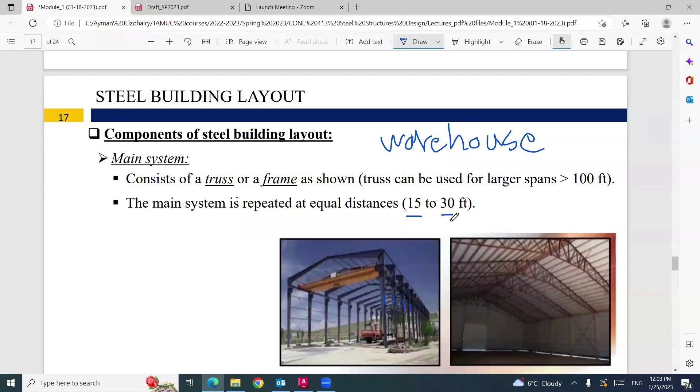Then we have something called the purlin. These purlins are connecting the main system at the top roof, and you have the full freedom to choose the location of these purlins if you are using frames. But we highly recommend the spacing between these purlins in the range of 5 to 10 feet.

But if you are using trusses, you don't have this freedom, because your purlins must be located at each joint of your truss. Not accepted. It's wrong if you put purlins resting on the member of a truss directly. It's not correct.

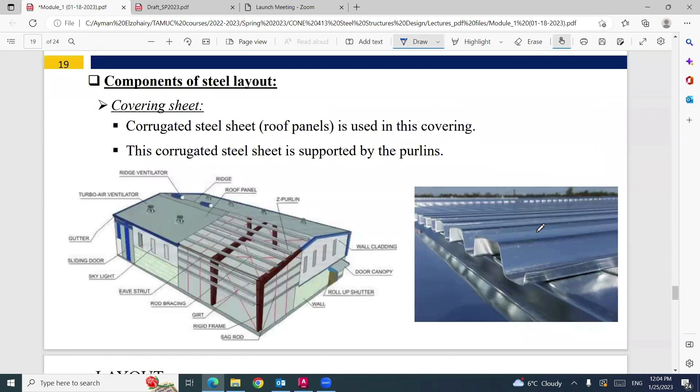After you put your purlins, we can put the corrugated steel sheets as the roof panels to make your covering sheet. We have also, from this side of the building and the other side, and this side also, something called side girts. Something looks like purlins, but extended on the side of the structure. We have end gables from only two sides, this one and the other one.

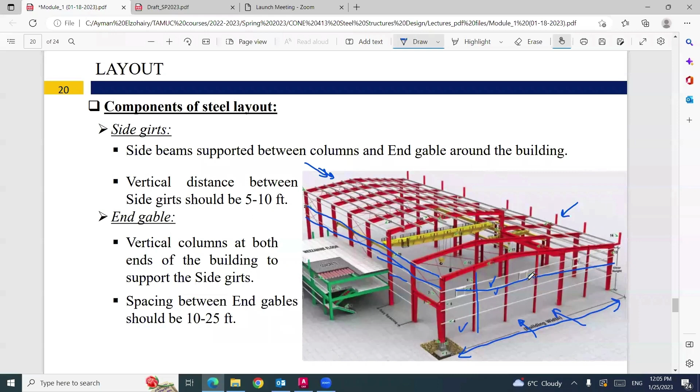We cannot leave this span, this width of the building, without any intermediate columns. So we will provide columns here. These columns are called end gables, just to support your side girts and also to support walls or doors or windows or whatever you have from this side and the other side.

And the last component was the wind bracing. I told you the wind bracing is used for the first and the last panel. If the length of the building is too much, more than 50 or 75, we can provide one in an intermediate panel. But if your length is smaller than this, that's fine, the first one and the last one only.

Horizontal bracing at the top, we are doing this diagonal. And if you have horizontal wind bracing, that means you must have vertical wind bracing, just a diagonal between the two columns of the main system. So these are the different components of your warehouse.

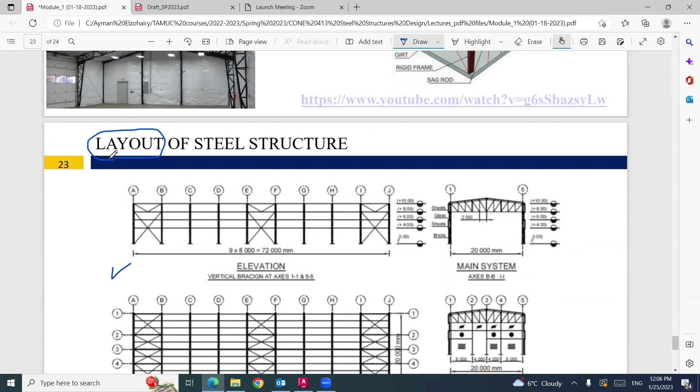Today, we will learn how to draw your views, which is called layout. This layout is very important because you will determine some information. Keep in your mind, the plan means you are looking from the top. This is called plan view.

And I would like to highlight a point. The language between engineers, each other, and between engineers and workers is drawing. I will not write a statement explaining the warehouse components. No, I will provide this drawing for the workers or the general contractor. That makes sense? So what I covered verbally last meeting is already explained in this drawing.

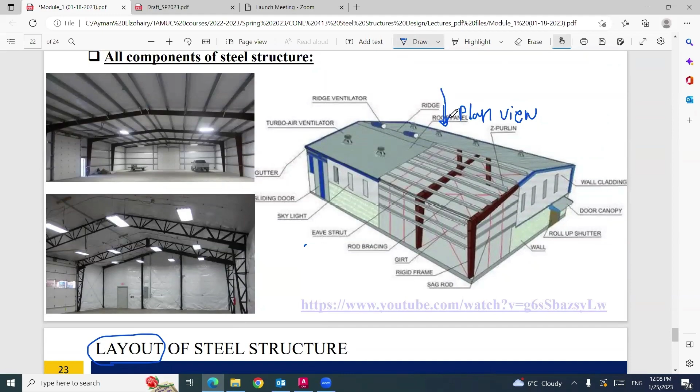Let's see. I will explain first how to draw your plan, and what all of these lines mean, one by one. Plan, as I told you, you are watching from the top. So I have a question. If you look at this main system from the top, which is repeated uniformly, anybody can tell me what you are going to see?

Line, thank you, Mitchell. Yes, only one single line. This line is representing the top part of the main system. What about this column? You cannot see it because you are watching from the top. However, I will represent these two columns by this I section and this I section.

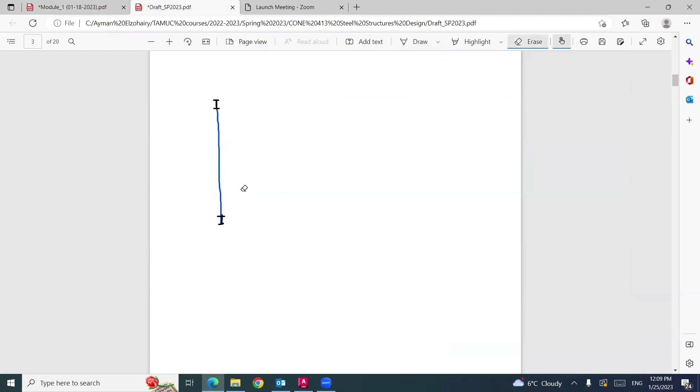So what does it mean? It means we have two columns and this line in between represents the beam of the top part of the main system. Keep in your mind that this main system, frame or truss, I don't care. If you are watching from the top, I will see only the top part of this main system. Just a line, and then a column, and another column.

Keep in your mind, this main system is repeated with uniform distance. So I will repeat these lines here. One more.

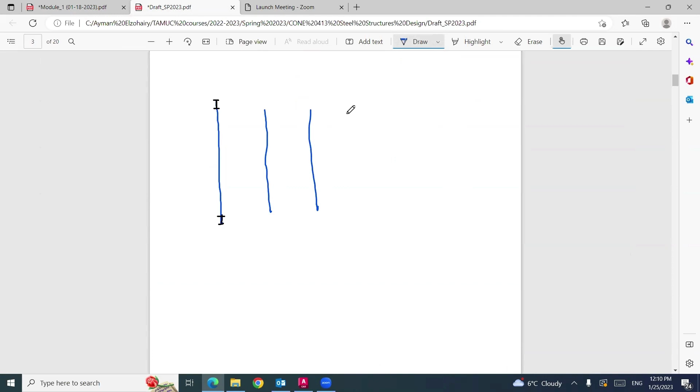I'm repeating the main system, however many you have, but all of them at equal spacing. Keep in mind, it looks like we have 1, 2, 3, 4, 5, 6, 7 spacings. Assume your spacing is, for example, 15, 20, 25 or 30 feet, because we have a range for spacing between main systems. So

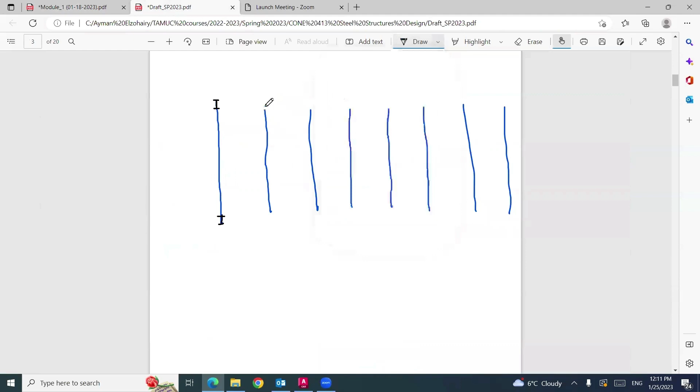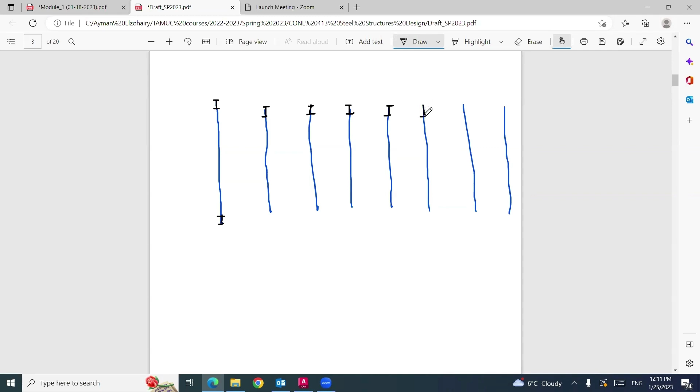I draw this main system as a line, and this column looks like this, and this column looks like this from the top. So I will complete my columns. If you are using AutoCAD, it will be very easy. Just draw one and make copies. I will show you this on AutoCAD very soon. And also from the other side.

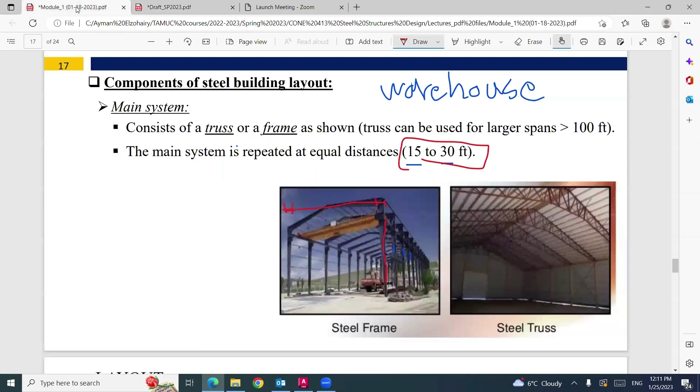What I'm drawing right now is a plan. I'm drawing the main system, how it will look in plan. These are the main systems of your structure. This line is your main system, this line is your main system, and so on.

Does that make sense? So these lines, which are solid and thicker, represent the main system. Keep in mind, I put an indication for the columns, just something very small like this, an I at each main system. That makes sense? This is the first one. Keep in mind,

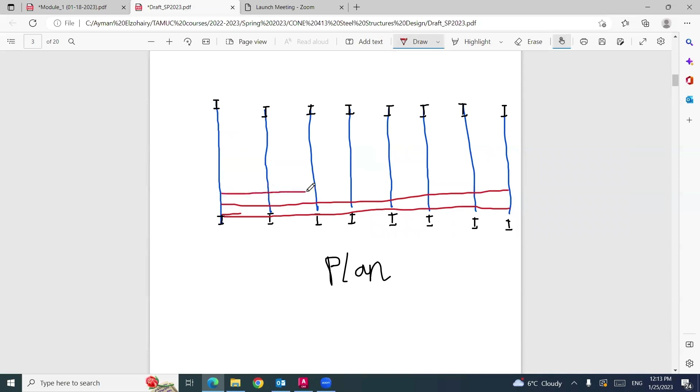we have purlins. I will change the color. These purlins are perpendicular to the direction of your main system, in the second direction. So if you represent your main system as a line like this, the purlin will be in the other direction. Do you remember the spacing between your purlins? You determined this, for example 5 feet, 6 feet, whatever. So I will draw lines this way. We have a purlin. After 5 feet, I have another purlin. After 5 feet, another purlin. I'm not 100% exact, but these are lines.

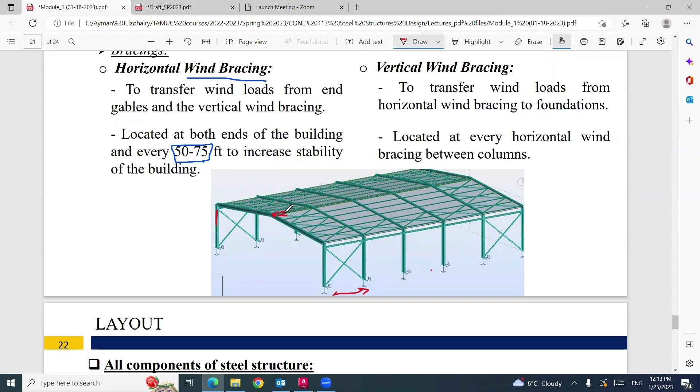Assume they are lines. One more important thing: if you look here at this top point, we should have two adjacent purlins. Here you go. This is the top point of your main system. Because at this point we have different slopes, the slope of this part like this and the slope of this part like this. So this is a turning point. At this turning point, we provide two parallel purlins, one at the end of each part of the main system. That makes sense?

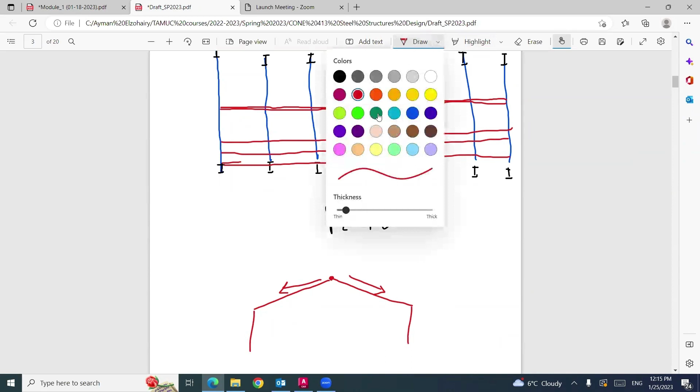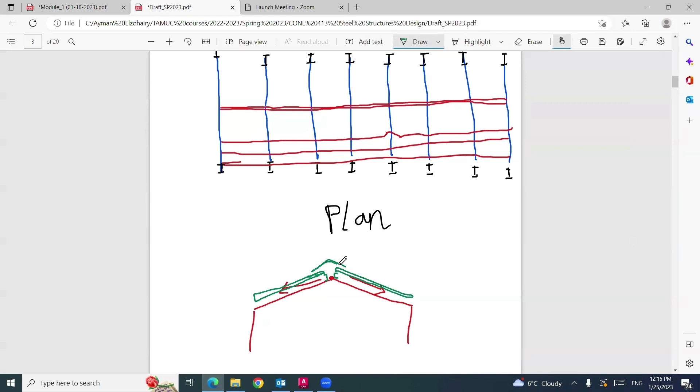So at the intermediate point, we should have two adjacent parallel lines. These two adjacent parallel lines represent the point of change between this slope and this slope of your main system. We provide two purlins, one at this end and one at this end. This purlin will support the corrugated sheet covering this part, and this purlin will support the corrugated sheet covering this part, and here we will provide something like this. That makes sense?

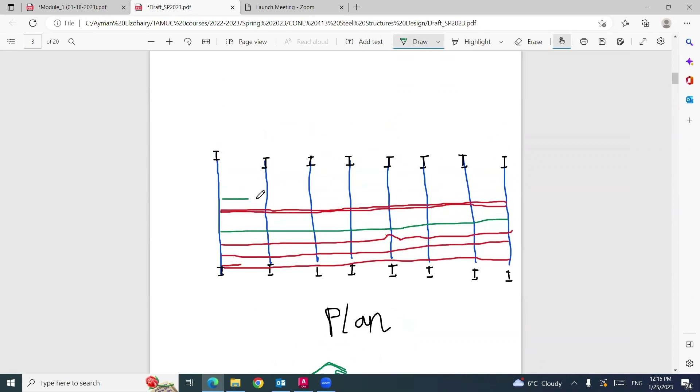So at this turning point, we will have two purlins. Keep in mind, your purlins extend here, every 5 feet or whatever you select. Here you go. That makes sense? So in your plan, at the midpoint of your main system, we have two adjacent parallel lines. This is a purlin, another purlin, another purlin, and here two, with just 1 or 2 millimeter spacing between the parallel lines. And we have purlins here. That makes sense?

In the first panel and the last panel, I will draw diagonals representing the horizontal wind bracing. Probably we can use this color. For each two purlin spacings, I will draw a diagonal. We are missing one here; we should have one more, because your plan must be symmetric. This side exactly like this side. So we should have a diagonal. I will provide these diagonals at the first panel and the last panel.

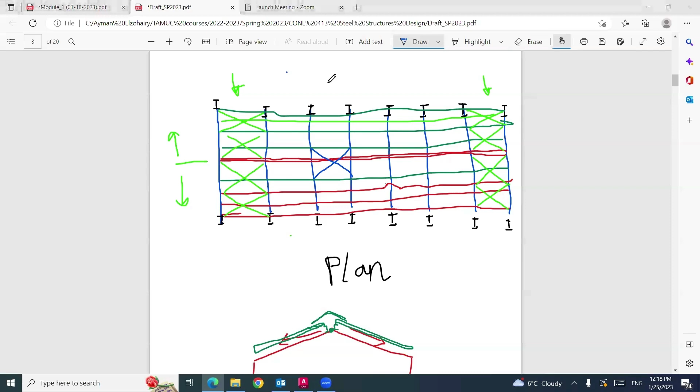The fatal mistake here is if you draw a diagonal like this, and I would like one of you to say what the mistake is if you draw a diagonal like this. Can I do this? Can I do this diagonal at this location? If not, why? Thank you. Yes.

Let's go back here for this one. Everybody, can you watch the top? This is the turning point between this slope and this slope. I need one of you to imagine, how can I draw a diagonal between this side and this side? Doesn't make sense, because you are connecting two different slopes, two different surfaces.

Yes, I understand that you can provide a diagonal between this point and this point. We can understand that we can provide diagonals between these points and these points. Doesn't make sense to provide diagonals between this side and this side, because you are talking about two different slopes. That makes sense? So don't do this.

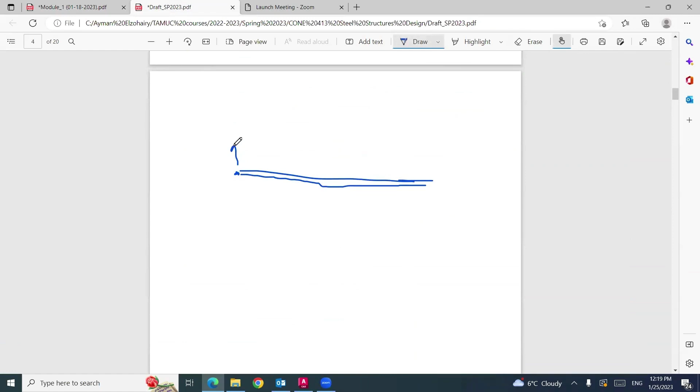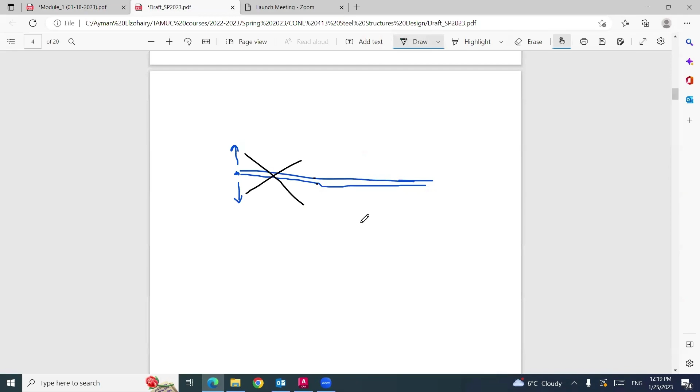If you have the two adjacent parallel purlins, which represent the turning point between this slope and this slope, don't do this. Don't put diagonals crossing these two adjacent lines. Doesn't make sense. You are doing a mistake. So these diagonals will end at these two parallel purlins.

That makes sense? Because we have horizontal wind bracing, we must have here vertical wind bracing, which represents this diagonal or these diagonals. So I will represent them by a dashed line here and a dashed line here. That means I connected diagonals between this column and this column, and another diagonal between this column and this column. Why? Because I have horizontal wind bracing.

We must provide the wind bracing at the first panel of your plan and the last panel of your plan. So we must have horizontal wind bracing and vertical wind bracing. If this length is too long, more than 100 feet, I recommend to provide an intermediate horizontal wind bracing. Just a second, like this. I'm sorry, guys, I messed up.

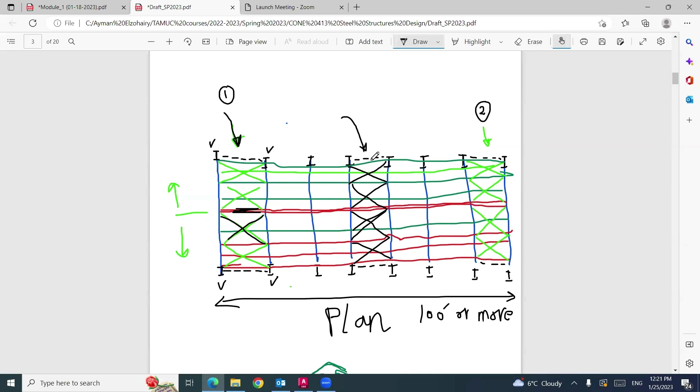And vertical wind bracing. If you have a very long building, if this one is 100 feet or more, I highly recommend to add an intermediate panel with horizontal and vertical wind bracing. If you look at this plan, it's exactly what you are seeing. So right now you can understand what's going on.

Hey, I'm seeing something else. Yeah, you are seeing circles and the name of each axis. It's just for fun, but we draw the main component we are looking for. If you open your AutoCAD, draw a line, for example, it's 30. This is the main system.

I can make this line thicker. Do you know how to make this line look thicker? I can select here the thickness I'm looking for, for example, 0.4. The thickness of this line is 0.4, but it looks normal, because you have to select this icon. If you select it, the line looks thicker. You know what I mean?

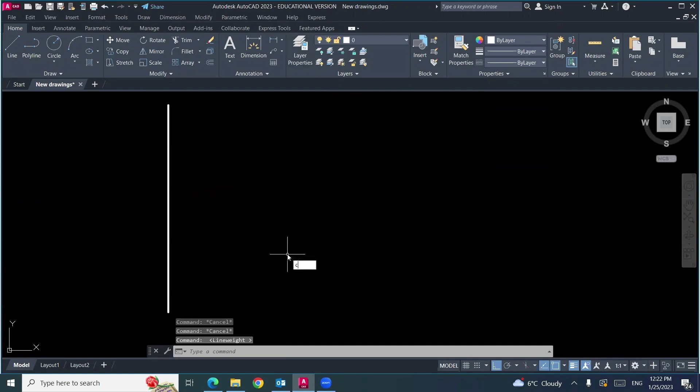And you can make a copy of this line. For example, the spacing is 20 feet. Then I can make more copies from this one to this one to this one. So if you are using AutoCAD to draw your plan, it will be very easy.

At this location, if you would like to represent your column as rectangles, that's fine, no problem. I will accept it. And you can hatch this rectangle as solid and move it to this end. So we have a column here and another column on the other side. These columns are repeated because we have the main system.

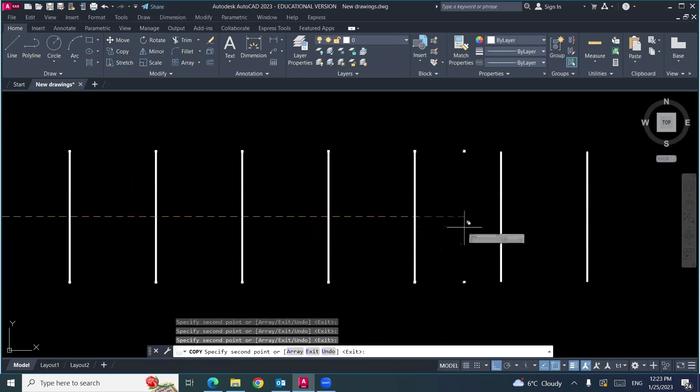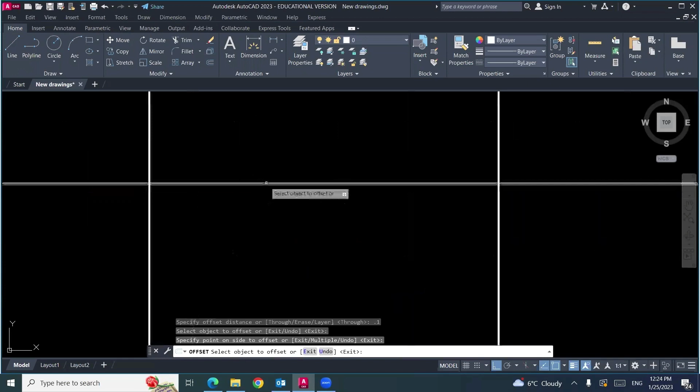So in a second, you can finish your drawing. These are the main system. Keep in mind, from the midpoint at this location, we must have an offset of 0.1, for example, 0.1 this way and 0.1 this way. So we have two parallel purlins at this location.

So I drew the length as 30. We have a purlin here also. So the spacing between this one and this one is 15. I will divide it into 5 spacings or 3 spacings, whatever, it's up to you. I will make an offset of 3 meters.

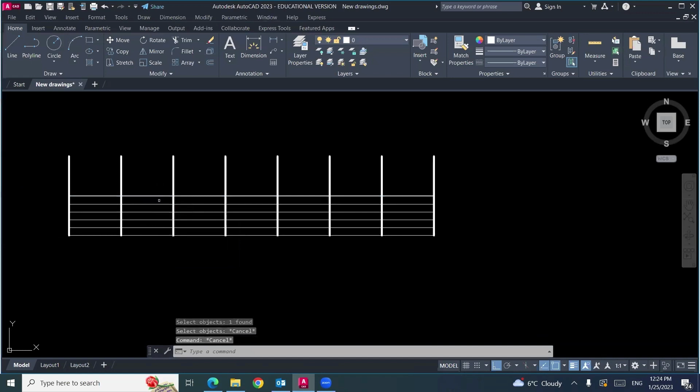There you go. If you would like to make a mirror, I can select all of these. Mirror, MI. I can select all of them and make a mirror like this.

There you go. So I draw this plan. I draw the main system, looks like lines. I gave indication that I have a column here.

It can be accepted like rectangles, that's fine. But the best way to draw your column looks like this. This is the best way.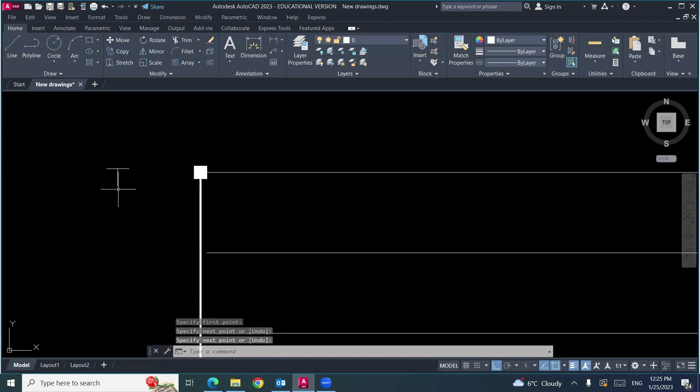Looks like this. And if you would like to make this thicker, you can select the thickness and then move them at this end. This is the best way.

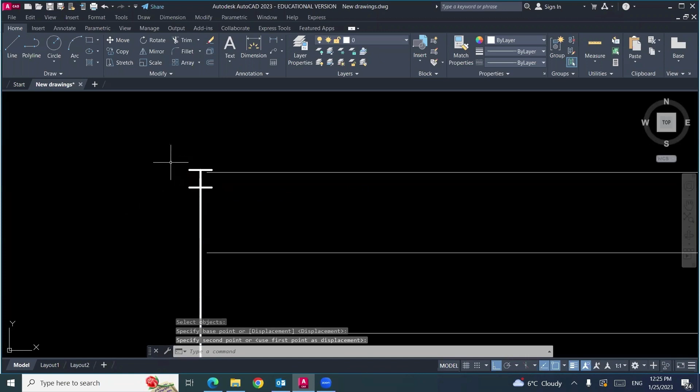I'll remove this one. There you go. This is the best way to represent your column. But if you would like to make it like rectangles, that's fine. I will accept it, but this is the best way.

Okay, let's remove these. In AutoCAD, everything can be done very quickly. Just to remove.

Then I will take copy for this column and make many copies.

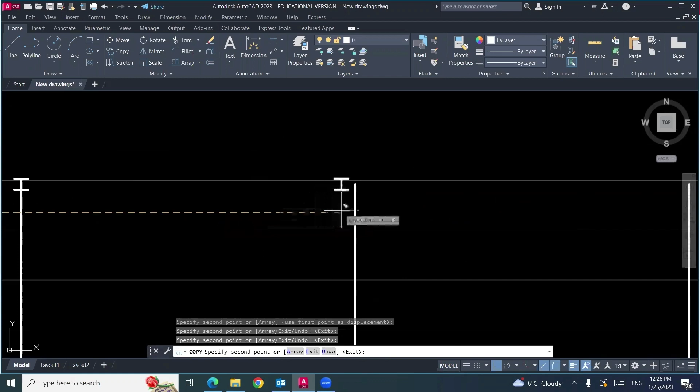It's very important to remember how to use AutoCAD in your drawing, not just for this course, but for your life. AutoCAD is important. Once you did one side, you can make mirror for this and make mirror about the midpoint.

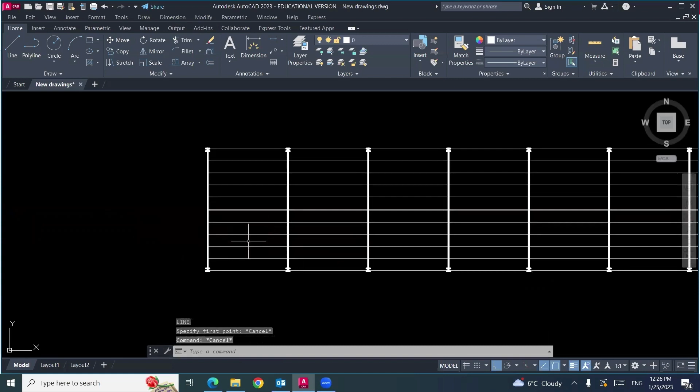Here you go. Yeah, that makes sense? For diagonals, I will do diagonal, but keep in mind 1, 2, 3, 4, 5. We have 5 spacing, so you can adjust them, making diagonal.

Like this for the first 2. And then you can make diagonal with the next 3.

That makes sense? You cannot leave one rectangle without diagonal. If you decided to put wind bracing at the first panel, you have to provide diagonals for all of them. If you put your diagonal for each 2, that means the remaining one will be without diagonals.

It's okay to provide this diagonal, but we don't recommend using one diagonal for one rectangle. I can accept this, I will not say it's wrong. Okay.

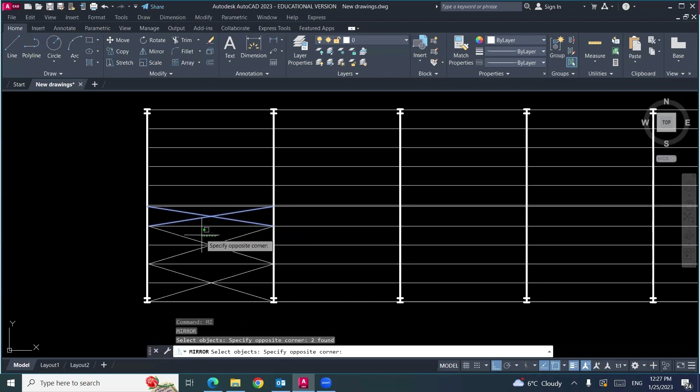Once you did this for the first side, I can make a mirror. Here you go. So you did this for the first panel, I can make copy for these diagonals.

I can make copy. How can I make a copy right now? Okay, I can make a copy from this column.

I did a copy to this one. No, I did not do a copy, I did mirror. Anyway, CO, enter, copy for these members.

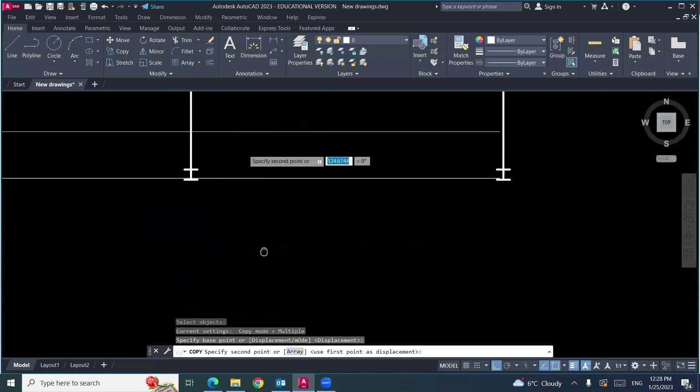And I will catch it from this column and put it here at the same point on this column. There you go. That makes sense?

I highly recommend you do this. If you would like to make these lines dashed, you can do it. But if the dash line scale is too much, you can select it from modify, properties, and make the scale smaller, 0.2 for example.

There you go. If you would like to make this one look like this one, okay, go ahead and select the line you adjusted and choose match properties, this one, and then select.

Oh, I'm sorry, no wait, not this one. Which one? Me, I cannot remember the shape of the icon, but yes, match properties. This one, match properties. What do you mean?

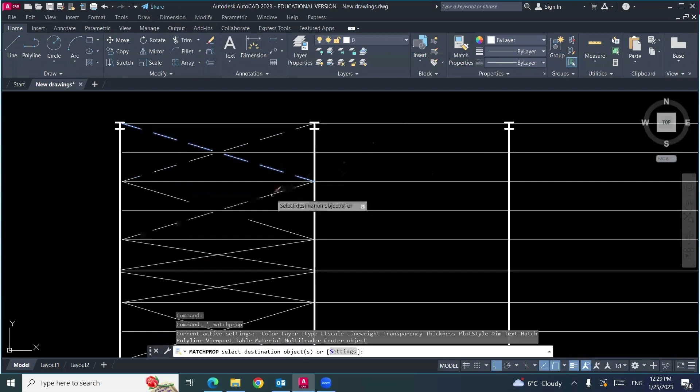I mean, I would like to make this line look like this line. So select what you would like to make like this one, and then get the command, then select the other line, so the other line will be the same.

I highly recommend drawing your diagonal like a dashed line. This is very important. You should do this before doing copy.

These are the horizontal wind bracing.

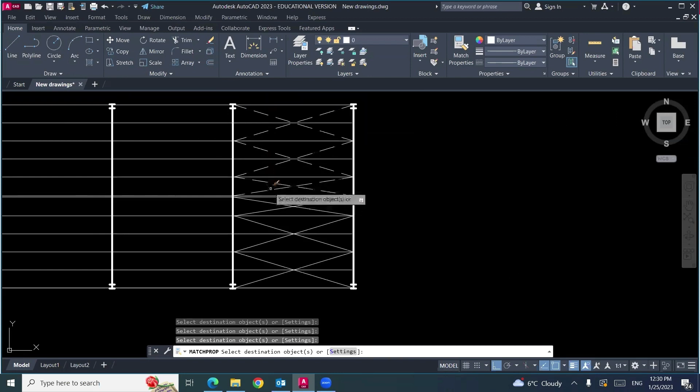There you go. Don't forget, if you have horizontal wind bracing, which are these diagonals, we must have these vertical wind bracing, looks like dashed line.

So how can I do this? Just draw a dashed line here, in this column and this column.

How can I make it dash? You have many options. You can select this one and make match properties, or select your line from this one, select the dashed line. If you feel the scale is too much, just select the line one more time, modify properties, and adjust this scale to be 0.2.

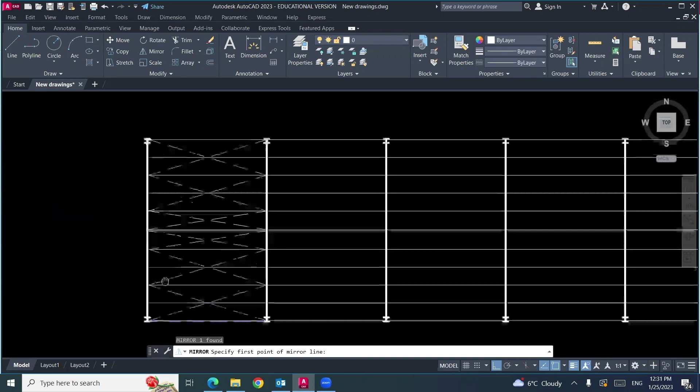Does that make sense? There you go. So I put here the vertical wind bracing. If you would like, make mirror to this line at the midpoint to be on the other side.

If you would like, you can make copy for these two vertical bracing, copy. I can catch it from this column and put it here.

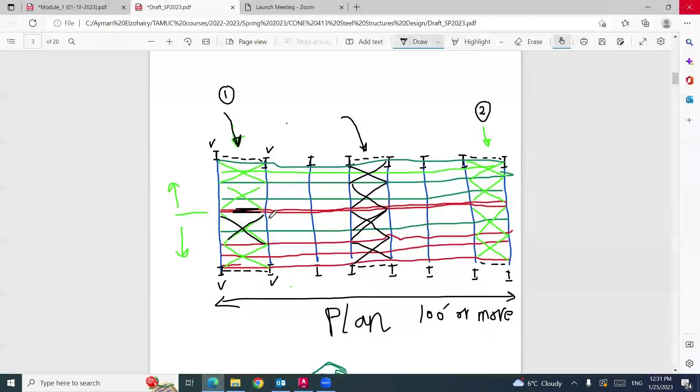This is your plan, this is exactly what it's drawn here. If you would like to make these circles, it's very easy.

Very easy. We can draw a line with a length, for example 3. Line with 3 lengths. I can select this line and it changes the color to be red.

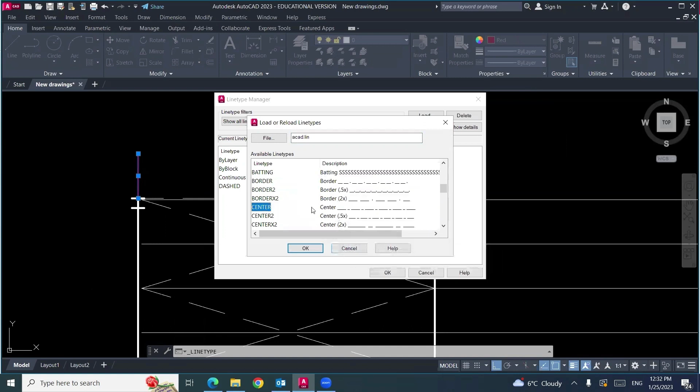And I can select this line and make the shape look like center line. We can select here, center. There you go, center line, center, the first one. Select the line one more time and choose center. So it's a center line.

And draw a circle. Move this circle to be here. Then you can make copy for this center line and the circle and put it here at each column. That makes sense?

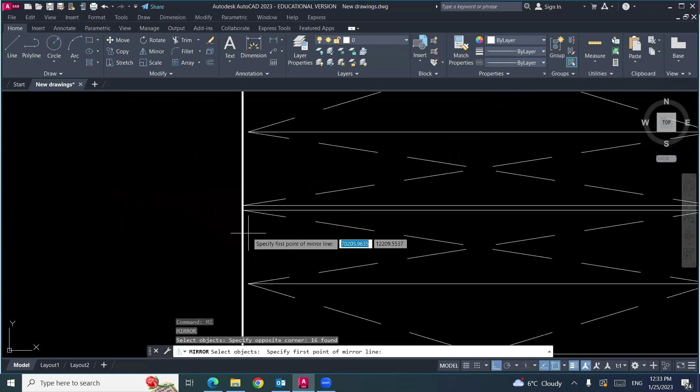If you would like to make mirror for these lines and the circles about the center point, there you go. If you would like to draw circles at each position of your purlins, that's fine, it's up to you, you can do it.

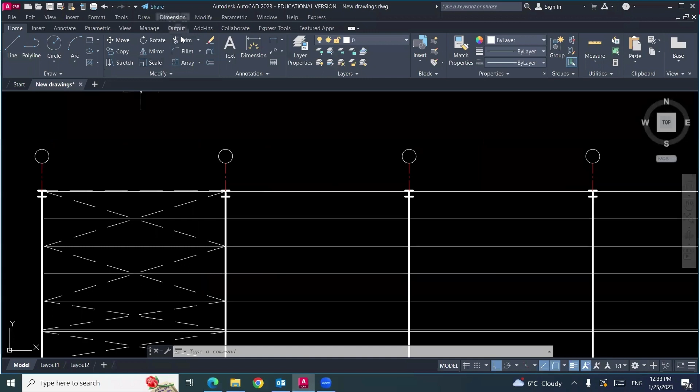And also after you are done, you can put your dimensions. Dimension linear between this line and this line. So the dimension between the main system - if you read your drawing, I can say the spacing between this main system and this main system looks like 20.

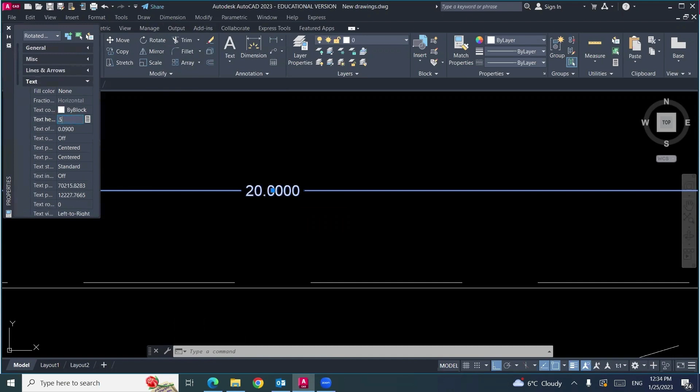If you are not feeling good about this format, you can change it from select it and then modify properties. You can go to text. Your text height can be bigger, 0.5. How many number of decimal? It should be down here. Here you go, the dimension.

No, not this one, just a second. Yes, precision - how many number of decimal? You can select 1 decimal or 2 decimal. I will select 1 decimal. 1 decimal is good, there you go.

Here is the dimension, you can repeat it one more time. Dimension linear from this point to this point. If you would like to make this one like this one, select this one, match properties. Where is that? Here you go, and like this, so this one would be like this one.

Or you can make copy. I will select this one and make copy between this point and this point, and this point and this point, and this point and this point. I put the dimension - I forgot one.

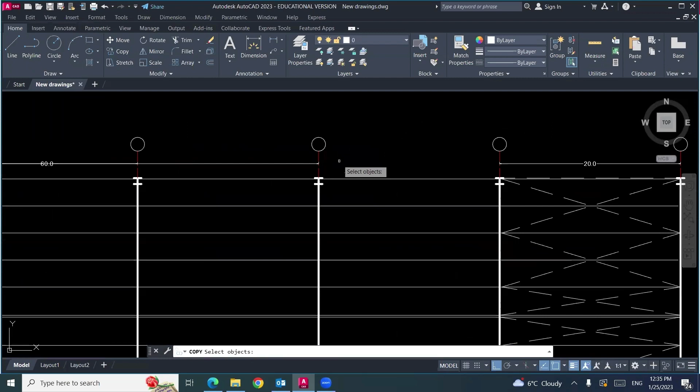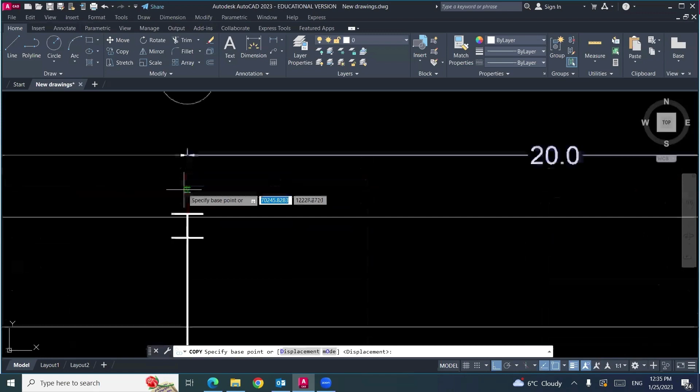Anyway, I recommend to do it one by one. So copy, CO, enter. Between this line and this line, here you go. And this line, here you go. And this line - I messed up.

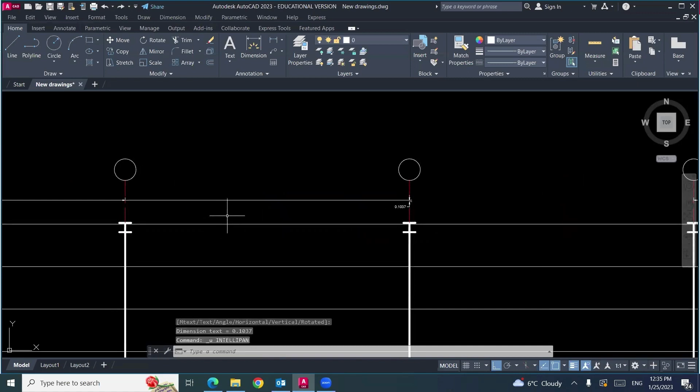Anyway, you can do it one by one. Don't make copy for dimensions, okay? So I will dimension linear between this point and this point. Oh goodness, wait. Dimension linear between this point and this point. One more between this point and this point.

If you would like to make match properties for this line and this dimension line, that's all. If you would like - and I highly recommend it - to put a dimension line for the whole length of your building, so as engineer I can understand that the total length of your building is 140.

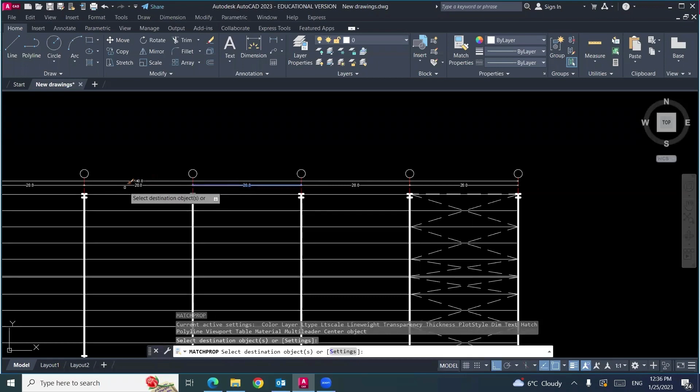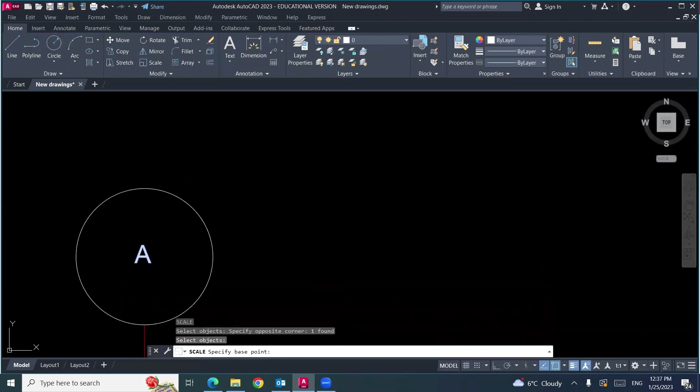Also, if you would like, I can write something here. I can move this A to be inside this circle. I can make it bigger by scale, more bigger, like this. Then I can copy this A to all of them.

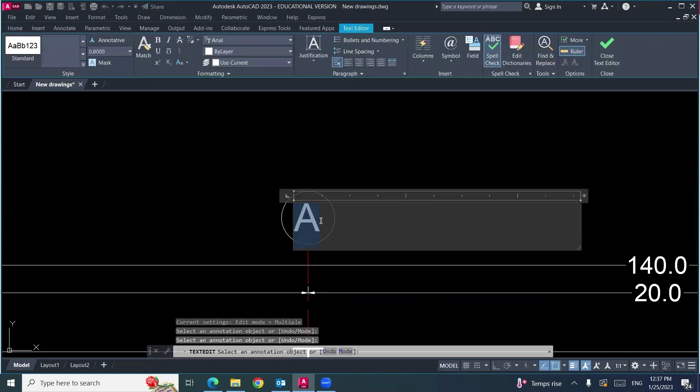You will ask me, hey, all of them are A? No. Once you put copy, you can double click here, or ED enter, and you can change this A to B. Just click, then you can change it to C. Then just click, you can change it to D.

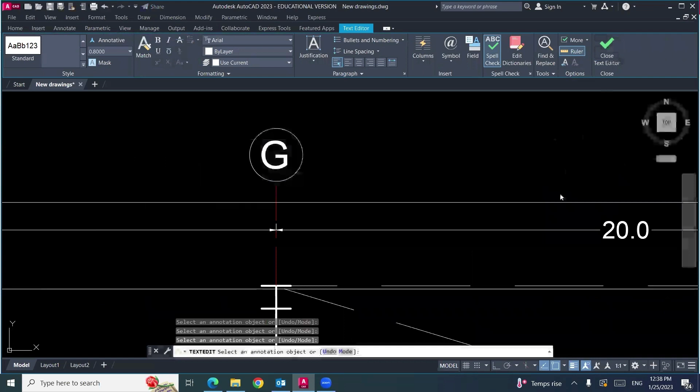Then just click - after D we have E, and click, what after D, E, F I think, F, G, and then H. Which H is important for me - my daughter, her name is Hannah.

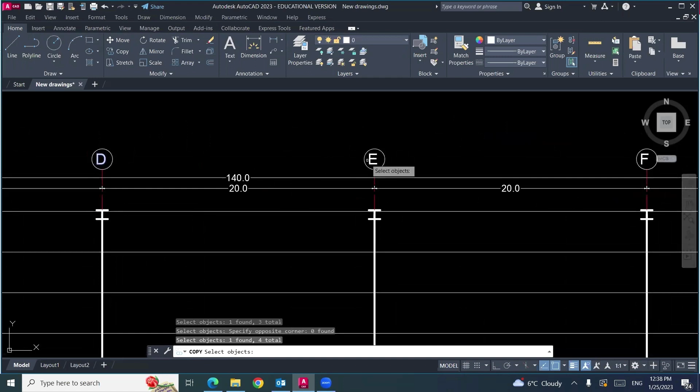So anyway, after you are done with these you can make copy for this text, all of them, and make copy to be on. That makes sense? This is called plan. I finished my plan in just a few minutes, just 15 minutes. This is the plan. I highly recommend it to use AutoCAD.

For elevation, elevation is very easy. You are watching from this side - this is called elevation. What you will see right now, if you are watching from this side, what you are going to watch...

I will watch only this rectangle, nothing else behind this rectangle. I will not look for anything on the roof, this side, or the back. I don't care, I will look only for this rectangle.

So what do you think? I will watch this column, and then the next column, and the next column, and the last column, and I will watch the side girts - side girt, side girt, side girt. And if you have vertical wind bracing, I will see this diagonal. That's all.

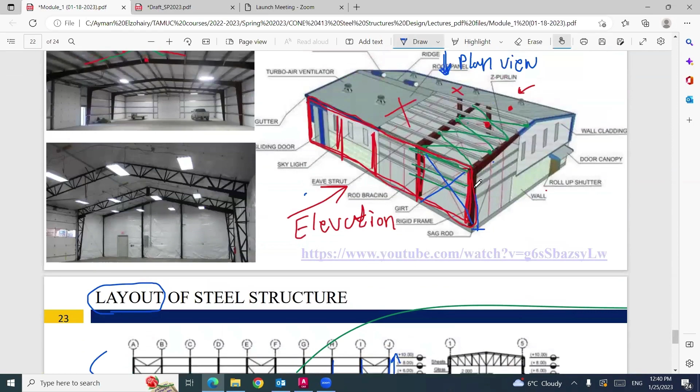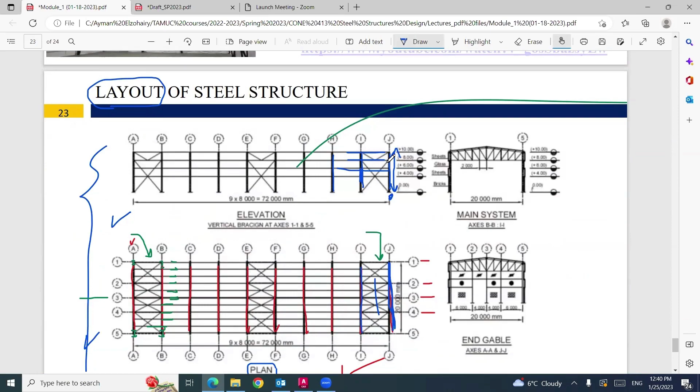And we have side girts, side girts, side girts. Because we have horizontal wind bracing here, we will have vertical wind bracing. The vertical wind bracing will be shown when you are watching the elevation. So let's open AutoCAD and I will draw my elevation.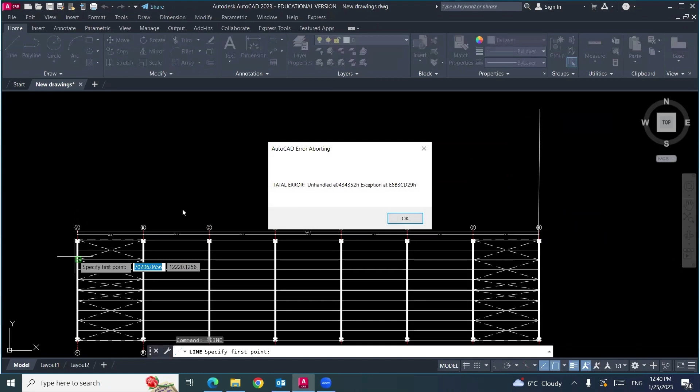Oh, I have an error. AutoCAD will close. I'm so sorry.

Probably I will try to open it one more time. Hopefully it's saved, hopefully. Open. Yes, recover, recover... no? Yes! We did it, we did it. So nothing was lost.

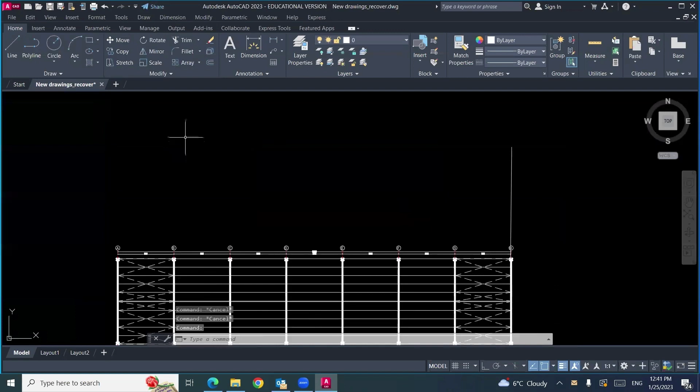Okay, so this is the most important step in your AutoCAD work: all the time keep saving, saving, saving, saving, so you don't lose anything. Sometimes an error can just happen.

So anyway, I will draw a vertical line, and I will have this top. After this, I have purlins, and I have side girts, for example every 3 feet. Then your column will be after 3 feet also, so I will trim.

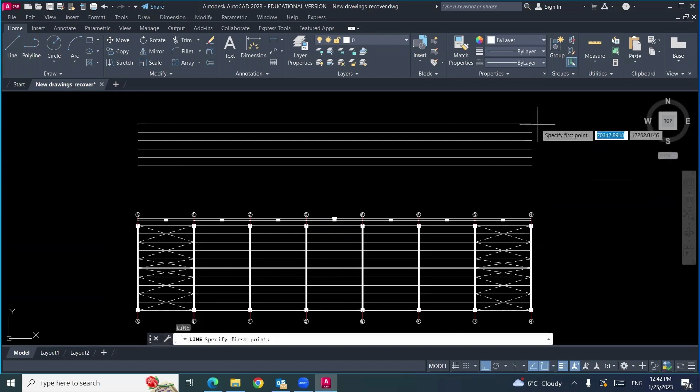Probably I can delete this one, right? There you go. So I have a line, and the line, and this one does not exist. There you go. Keep in mind this line is thick, so I will make it match - this line will be thick, because each main system will have a column in the elevation.

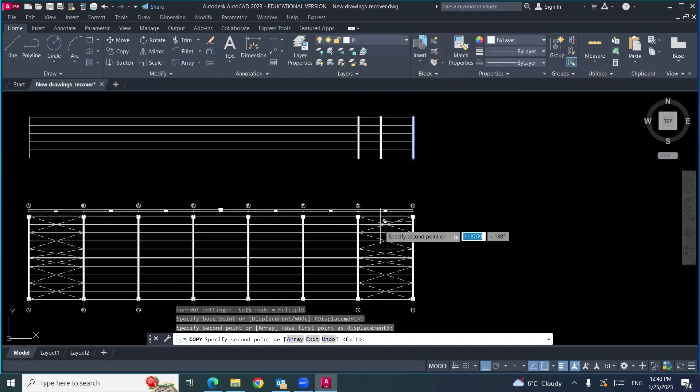So I will make a copy of this column at this location, this location, this location, this location, this location, this location, this one, and the last one. Here you go. Because I have horizontal wind bracing in this panel, I should have vertical wind bracing.

Probably I can do something like this - this diagonal and this, for the whole part. If you make it one diagonal, that's fine, I cannot say anything against it. Also, I will make a copy of this diagonal.

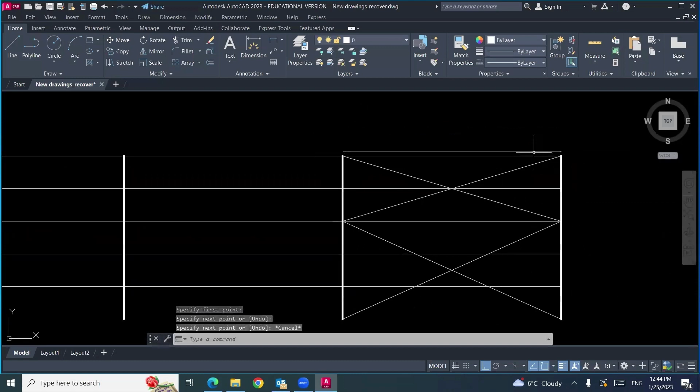Because we have vertical wind bracing here, we should have a line here with a dashed line. I can make it like this, to represent that we have horizontal wind bracing.

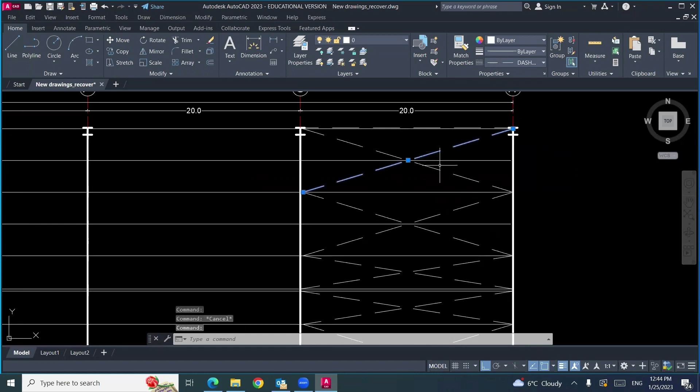So from your elevation, this line represents the horizontal wind bracing as a dashed line, and this diagonal represents the vertical wind bracing - you can make them dashed too if you like. From the plan, these diagonals represent the horizontal wind bracing, and this dashed line represents the vertical one.

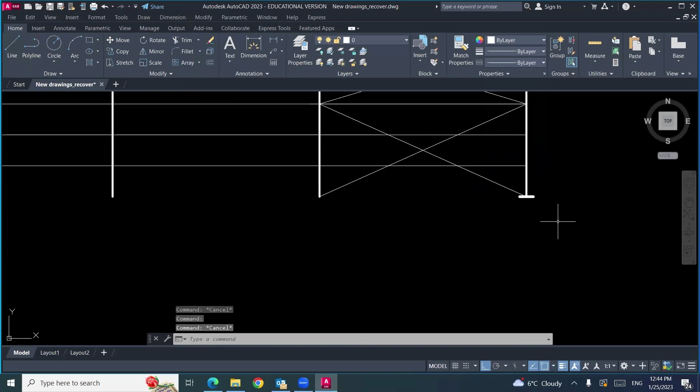I highly recommend drawing a horizontal line to represent your support, because we did not draw a support for your column. Make it thicker - yeah, something like this, that's all. I can make a copy.

Keep in mind, if you decide that we have horizontal wind bracing at any intermediate panel for some reason, like this one, we must have vertical wind bracing in this panel. That makes sense? Here you go.

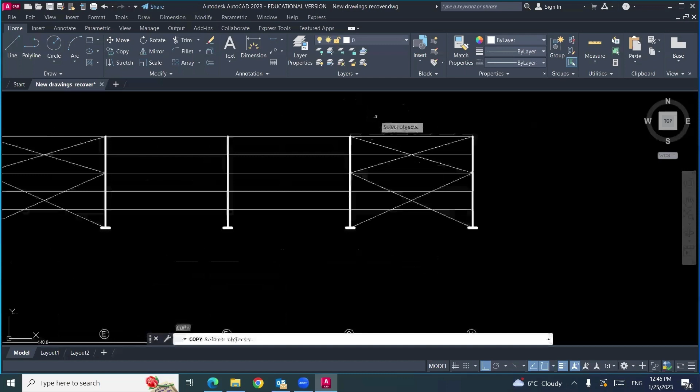This is the plan, and this is the elevation. And also you must have horizontal wind bracing. Here you go. If you would like to add these circles, you can do it here for the elevation.

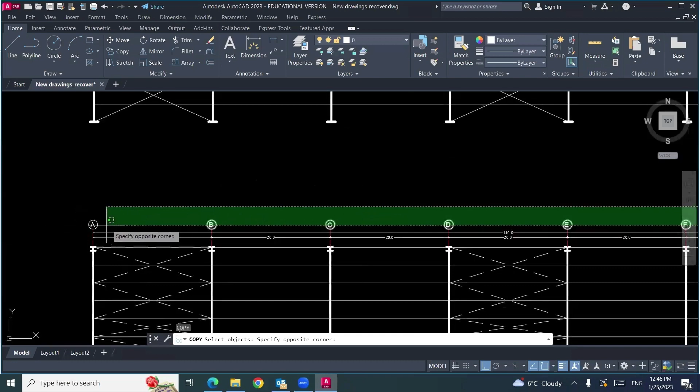It's very easy in AutoCAD, just make a copy of these circles and the text, and you can copy from this end to this end. There you go, very easy - it's AutoCAD.

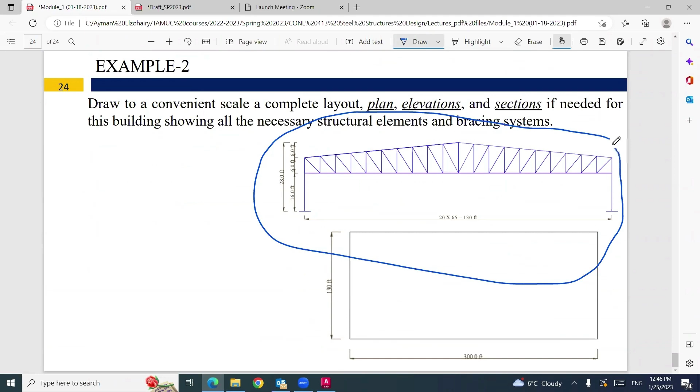Then we will do the side view. A side view is very easy - one of them is your main system. So for example, this is a side view: just draw your truss, or just draw your frame, that's all. In this case it's a truss - just your truss. This is a side view, just your main system, nothing else.

And your main system with the end gable and side girts - what do I mean? I mean I draw the side view for two positions. The first position, you are looking from this side, so you will see your main system besides this end gable, this end gable, and this end gable, and these side girts, and side girts. You know what I mean?

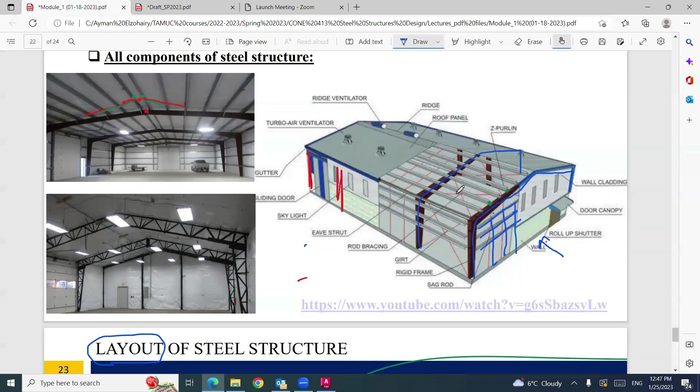And the other side view, you are looking at this intermediate main system. If you look at this intermediate main system, it will be without anything inside. This is the meaning of side view.

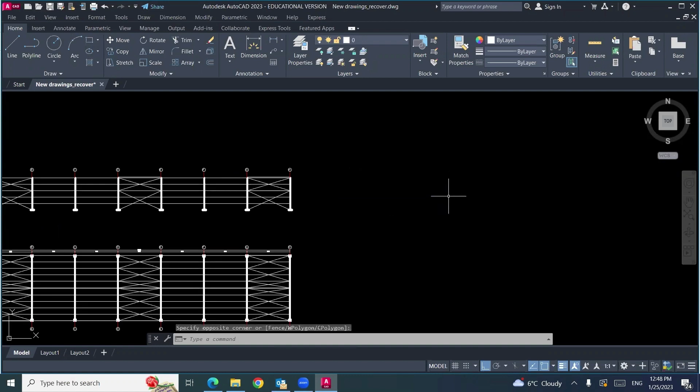So if you have your main system, which is this one, you can redraw it here and make two side views: one without the end gable and side girts, and the other one with side girts and end gables. This is the first example in this module, and your homework looks something like this.